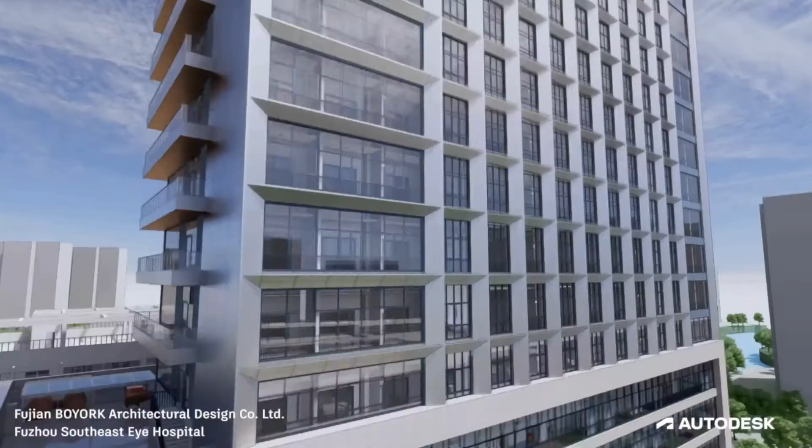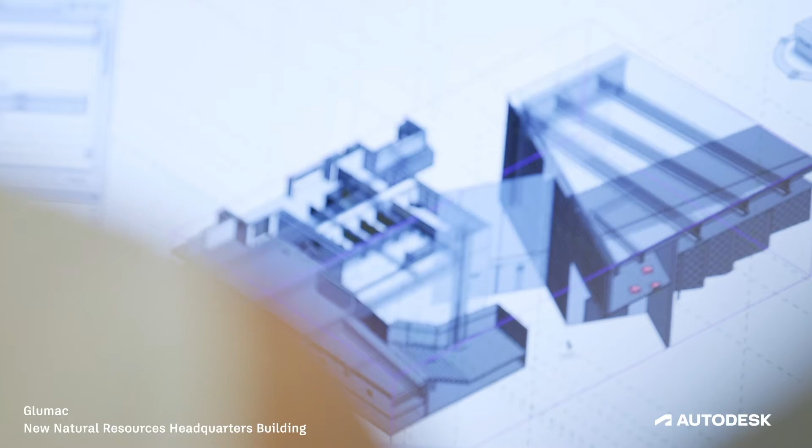So Rob, can you give us a bit of an overview of this relationship? Yeah, sure. I mean, the buzzword we're using in the industry around this is about convergence, and it really means construction and manufacturing coming together to realise these efficiencies. And I think in the construction world, BIM has been that unifying process for a long time now, a decade or more.

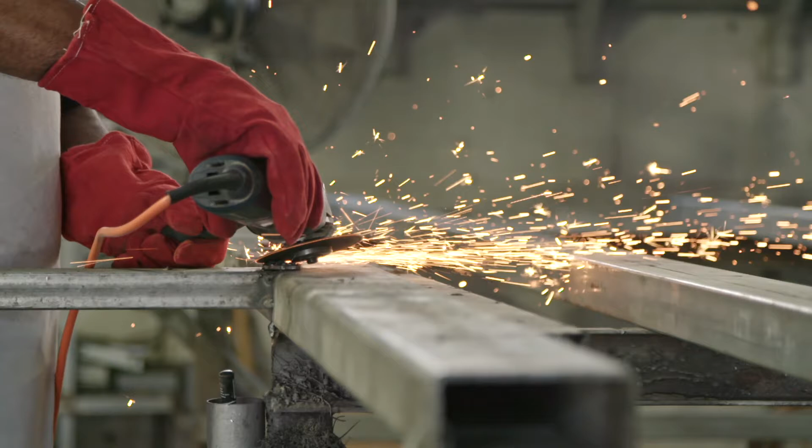But as manufacturing comes in, there's a lot that construction can learn from manufacturing about building off-site, building more efficiently, being effective in doing those things. But the way manufacturers design and build their things doesn't easily fit into that construction world at the moment. So there isn't a common language that those two industries can use to really have a conversation around materials and products yet. So that's probably where we need to, as two industries, come together and really work out what that common language needs to look like.

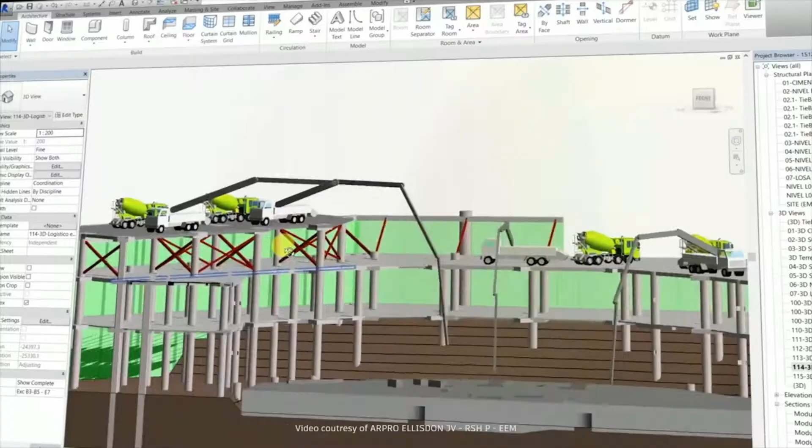Of course, and that is the perfect way to explain it, really, because it's not just about the models and the geometry of these products, because obviously the remit of a manufacturer is different to the remit of an architect. An architect is interested in constructability, and a manufacturer obviously wants to make sure their product does what it says on the box. They want to make sure they can analyse the systems.

Again, if we're looking at the HVAC industry, a manufacturer wants to look at an AHU and think, okay, what's my flow rate, my pressure drop? What's the performance of this model? And an architect is interested in some of that information, but they don't need the nuts and bolts model.

So it's about sharing the right pieces of information between the two platforms, and it's sometimes unfairly stacked against the manufacturing industry, because architects or the built environment sometimes expect that information given to them, and we've seen a massive uprise in NBS and BIM objects and so on and so forth. The manufacturers putting their products on those sites, because at the end of the day, if I'm a designer and I put your digital asset into my model, then that's what we're going to use.

We looked at sustainability last time. We looked at making sure that we try and implement as much information as early on in the process as possible. And this is what these models can provide us, really.

So I think you make a really good point there, Lee, and I think the level of detail that we use in BIM is where we could work with manufacturers more closely to make sure that the models and the information they're providing is appropriate to that level, because as you say, a manufacturer, when they're designing something in their software, are going to have to design every nut, bolt, washer and thread, which isn't necessarily information that needs to come across into the construction space.

So having a better conversation around LOD and what is actually required by the employer's information requirements is probably where we could create a common language and a common understanding.

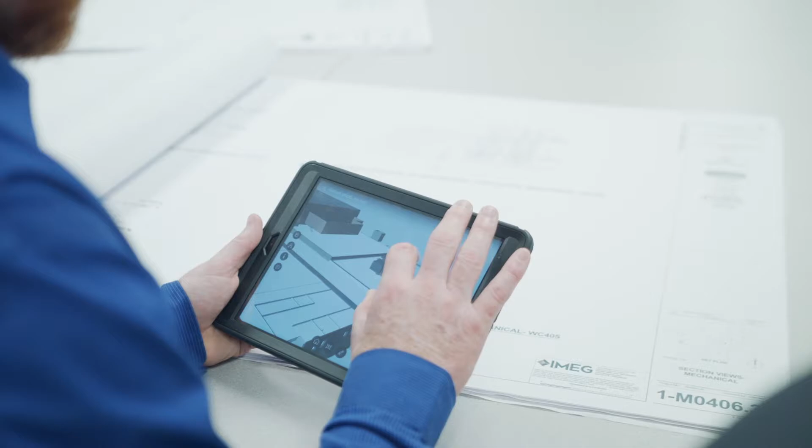And this is where technology can help as well, help us understand the context of the site, make sure that we've got this correct, because obviously if it turns up and it's wrong, then we've got problems. It's just making sure that we can effectively collaborate and communicate not only design intent, but also pass that information along the chain, really, everywhere from the civil engineers that are putting the foundations in, all the way through to the turnkey and CAFM solutions that we briefly looked at last time.

Absolutely, yeah. So, are you seeing any particular government information or texts that are coming out to help this in the future, or is it a case of just working together and sharing information and reviewing past technologies and past discussions and projects and building on that for the future?

I think if you look into 1192 and now 19650, the more at the construction stage, and obviously some of those documents go into the asset management stage, there is useful information in there to give you a bit of a framework. But for me personally, I've not seen that definitive standard or definitive document on how manufacturing and AEC, how that convergence is really going to work.

Yeah, a continuous workflow in a sense. And I really hope that, and I believe that construction and manufacturing aren't so arrogant as to think they can't learn something from each other. Yeah, and there's a proper open dialogue about these are the best bits of manufacturing, this is the best bit that the construction industry knows. How do we bring this together to affect real change for society?

And we're going back to what we talked about in our first talk, sustainability, because they overlap these things. They aren't standalone topics. There is definitely a huge overlap, and as we get further down the road, we'll see even more overlap around these things.

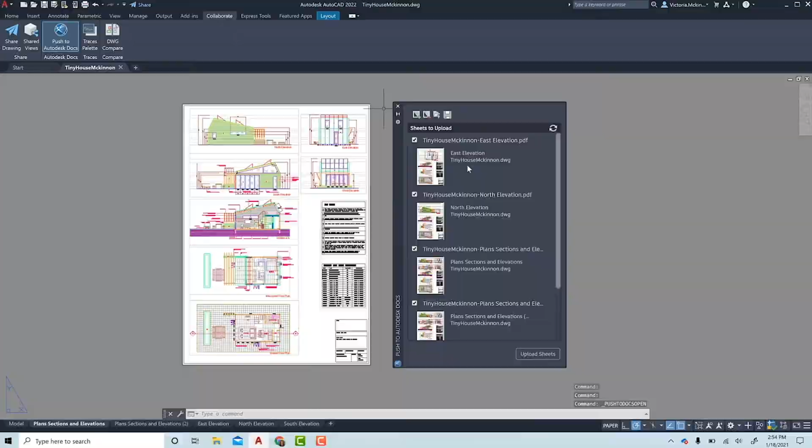Yeah, and we talk about change, and that's where personally I've seen a big change really is in that construction process. Stereotypically going from A3, A1 documents printed out and you find it in a puddle when you turn up on site, to more digital workflows, and being able to pick up on that digital asset that an architectural technician placed into a model 9 months ago, and being able to see the transition of why it's been put there, who put it there, and the reasons behind this, and just make for more effective coordination and construction when we get to site, which ultimately has an impact on sustainability, because we're doing things much more efficiently with less waste, with the right materials for the right reasons.

And then, as we touched upon last time, it doesn't just stop with construction. No, and technically, really, that's where it starts. That's where we start using that built environment and being able to feed into CAFM systems and have effective running of buildings, because it's not getting cheaper at the moment. Energy, it's not getting cheaper. So being able to utilise that built environment to its absolute maximum and most efficient processes, then that can only be good for everyone involved, really.